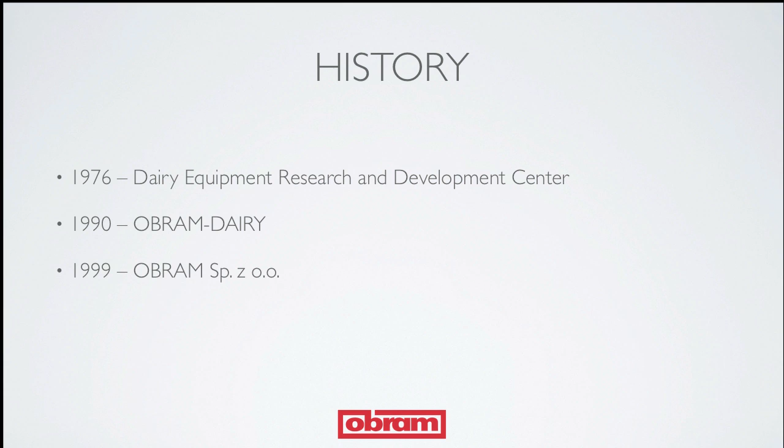The company specialises in producing equipment for the dairy industry, as well as the distillery, brewing, chemical and pharmaceutical industries. OBRAM employs over 250 people, including more than 100 engineers, specialists in the following branches: food technology, designers of technological processes; construction and design, designers of machines and equipment; industrial automation, designers of computer systems for production control, together with a system for control of critical points in manufacturing processes, the registration of parameters and visualization; manufacturing technology, preparation and supervision of the equipment production service.

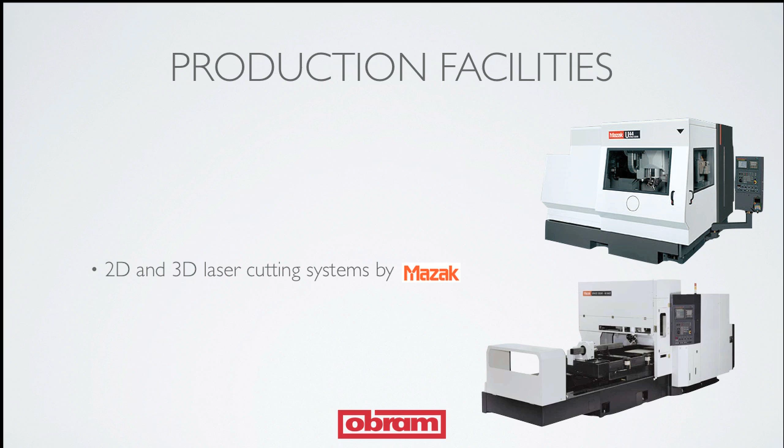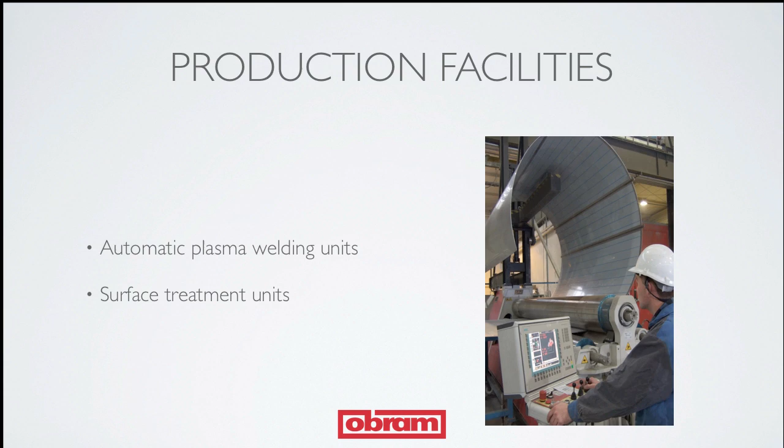Production facilities are localized in two factories in Olsztyn and in Ostrów Mazowieckie, which occupies 6,000 square meters in total. The company is equipped in modern machinery necessary for manufacturing cutting-edge equipment. This includes laser cutting systems, CNC centers, automatic plasma welding units, and surface treatment units, and so forth. Experienced and skilled employees guarantees the manufacturing of equipment with the utmost care, which also ensures an internal quality control system. OBRAM solutions use components only from reputable companies worldwide.

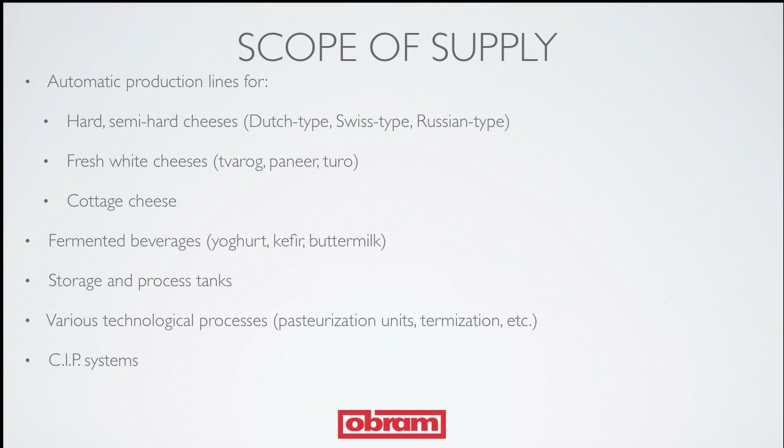The flagship OBRAM products are automatic production lines for different types of cheeses: hard, semi-hard, fresh, cottage cheese, as well as complete solutions for the production of fermented beverages. The company also manufactures all necessary equipment like storage and process tanks, pasteurizers, CIP systems, membrane filtration systems, and so forth.

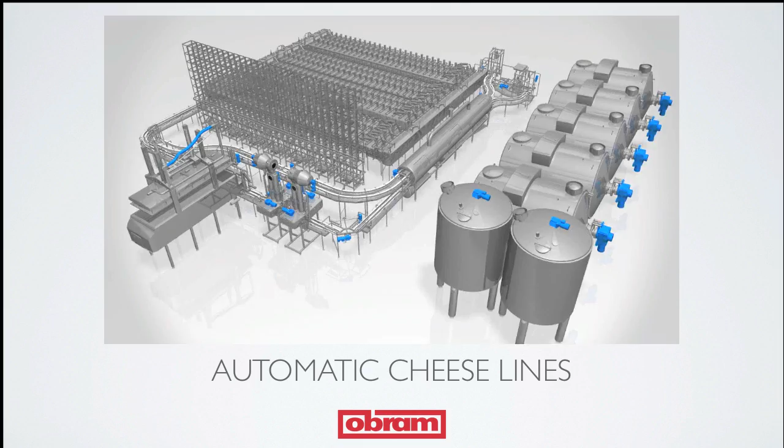Automatic cheese lines manufactured by OBRAM are designed for production of various types and kinds of ripening cheeses: hard, like Gruyere and Emmentaler; semi-hard, like Dutch, Swiss and Tilsit, and also semi-soft. The line size and composition may vary and depend on the market demand, ranging from several thousand to 1 million litres of milk processed per day. Cheese lines use closed transportation system ideology, involving individual pressing of each cheese. To operate such a line, only 2 people are needed.

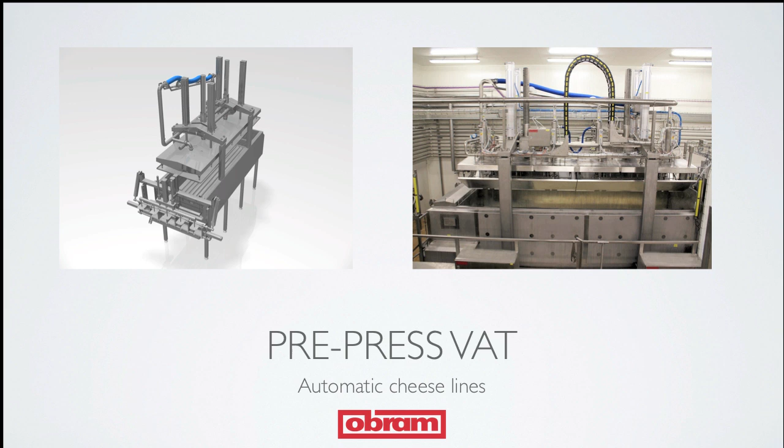A pre-press vat receives curd, drained off whey, pre-presses protein mass, and cuts cheese into portions. The pressure on the mass block is adjustable. All the vat functions, including cheese portioning and loading into molds, are carried out automatically and controlled by PLC.

The device consists of a vertical column in which curd moves. The system of valves gradually drains off the whey, maintaining the whey level above the cheese mass block. This condition is necessary in the production of cheese, with eyes typical for Dutch-type cheeses. The bottom part of the column is equipped with a system for cutting off the shaped cheese blocks, which are then put into the waiting molds.

Unlike the moulding columns for Dutch-type cheeses, the construction of these columns ensures the whey draining in the first stage of the process in order to provide good contact with air. The whey draining off rate depends on the type of cheese being produced. Moulding columns also work together with a conveyor for feeding empty moulds and collecting ones with cheese.

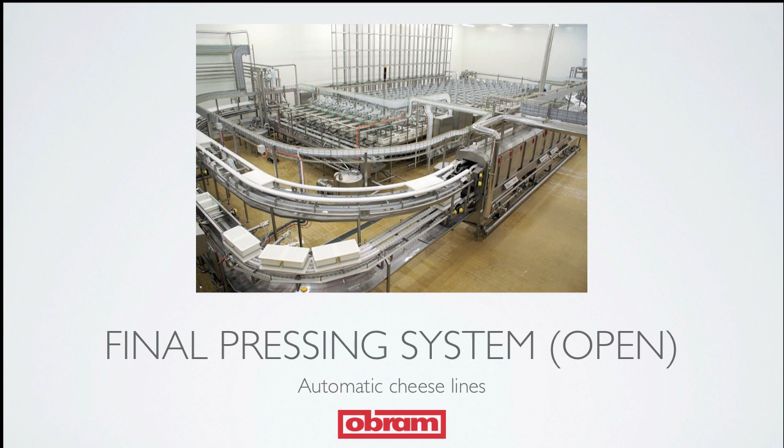The process of final cheese pressing is carried out in tunnel-shaped presses, whose structure is adapted to the mould size and the configuration of the cheese-making line. Presses may be single or multi-level, open or closed type, using forced pressing or cheese self-pressing. This force and duration in various phases of the process are adjustable.

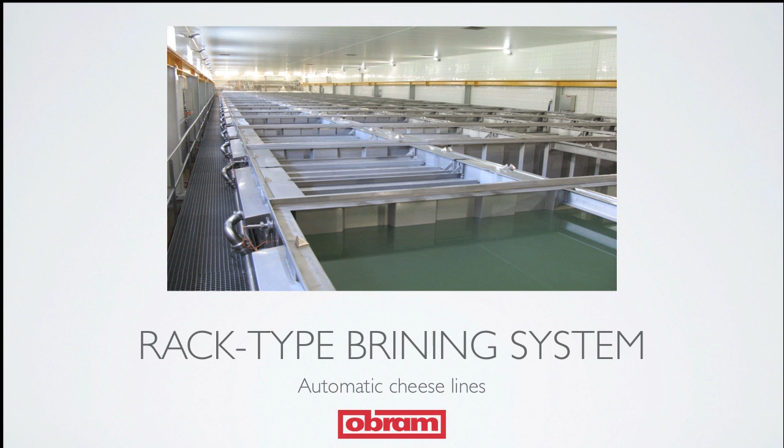Cheese brining may be done in various manners, in a rack type, in a river type, or in a mixed system. Each of these systems consists of similar elements. The difference is just the way the technological functions are performed. Microfiltration unit improves the microbiological quality of brine. It decontaminates and restores the brine's original form.

OBRAM also provides systems for cheese ripening. Another flagship product is automatic line for fresh cheese production. Equipment might be used for several types of cheese production: Tvarog, popular in Eastern Europe, Indian paneer, Kashkaval, or mozzarella.

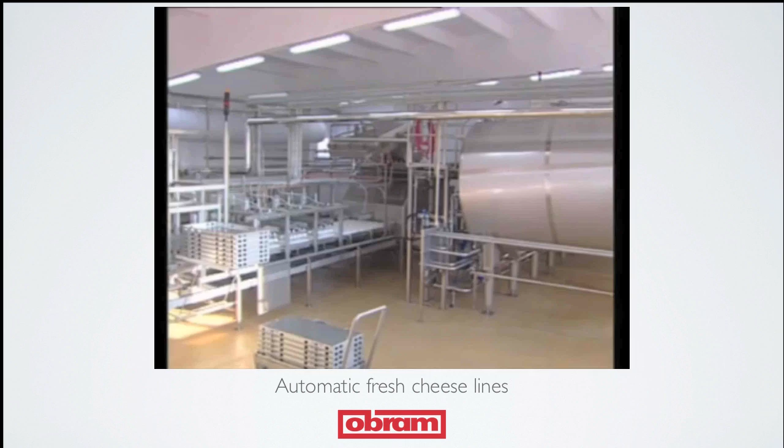Following thermal treatment, normalized milk is pumped to coagulation vats at the temperature of inoculation. Addition of the starter initiates the process of fermentation in the coagulation vat. The resulting curd undergoes thermal treatment and is evenly and gently stirred. Subsequently, part of the whey is separated and the curd thus produced is transported to the moulding and pressing device, where it is moulded to achieve the shape and the size requested by the customer.

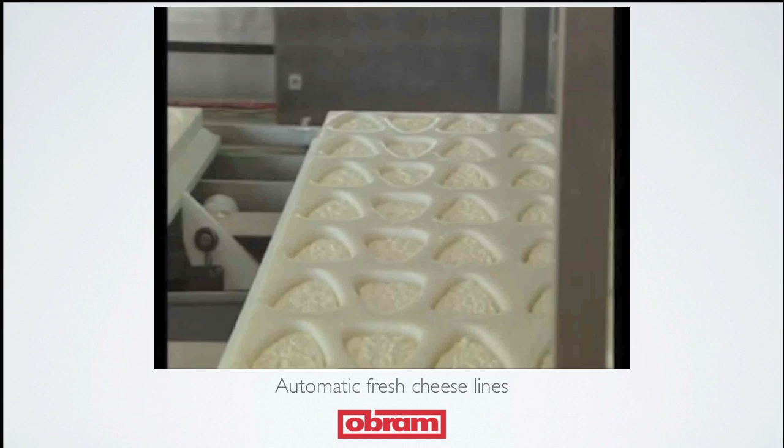Portions of fresh white cheese are put into moulds and finally pressed. Following the pressing phase, multi-moulds are emptied and transported to the cleaning station, while the cheese is packed and cooled down in a flow-through or transported to the cooling chamber.

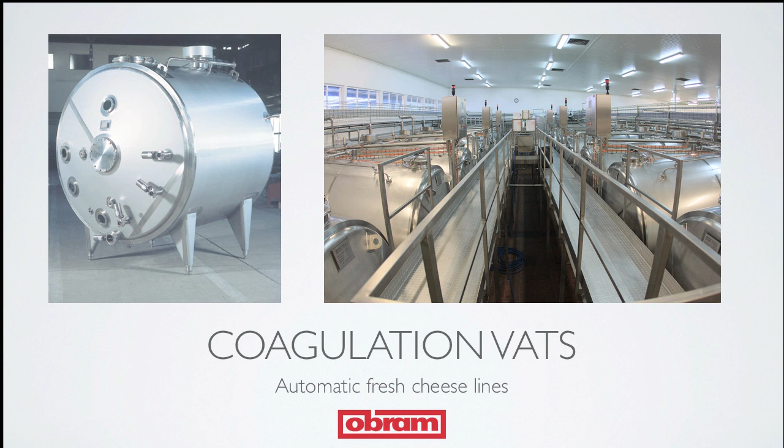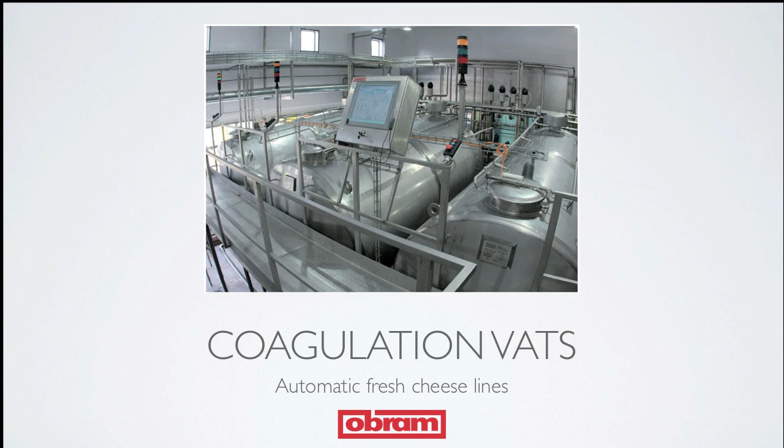Depending on the customer's needs, OBRAM offers coagulation vats with two working volumes, 6,000 and 10,000 litres. Owing to the process automation and the vat's horizontal shape, it is possible to achieve high-quality curd mass with minimal protein loss. An integral part of the system is a belt whey separator, which separates whey from curd mass.

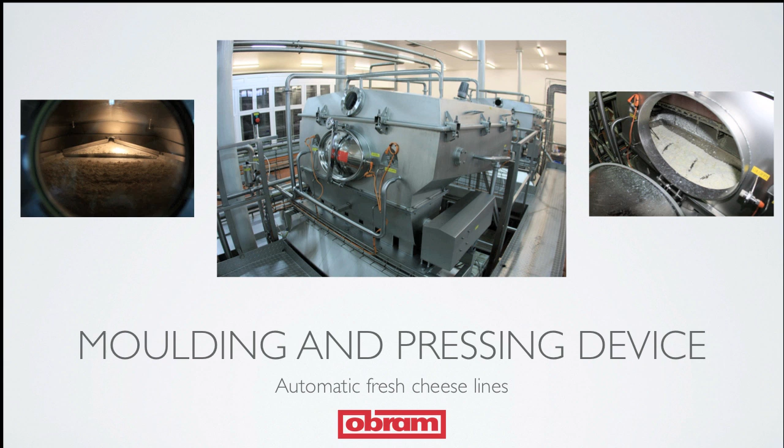OBRAM has designed original multi-moulds with a monolithic plastic structure, and depending on the cheese shape, 20 to 40 cheese portions can be pressed into them, with a total weight of about 10 kilograms. The shape of cheese portions depends largely on the customer's needs.

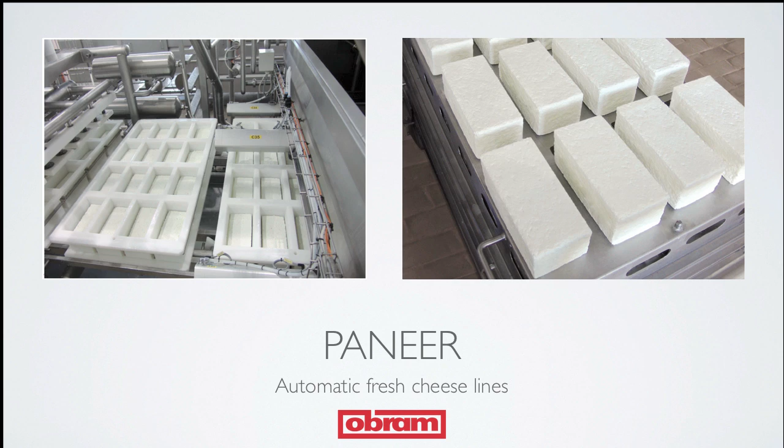The advantages of OBRAM's automatic fresh cheese production line are: the fresh cheese production process, from milk preparation to cooling down, is all automatic, with no human contact. Each stage of the technological process is supervised and archived by the central automatic control system.

It is possible to produce fresh cheese in any shape. It is possible to produce fresh cheese with equalized mass. There is also the possibility to adjust fresh white cheese unit mass, and a CIP system for device cleaning.

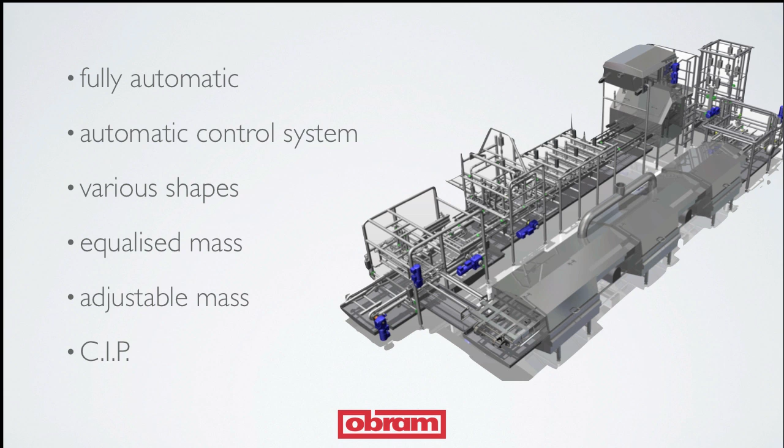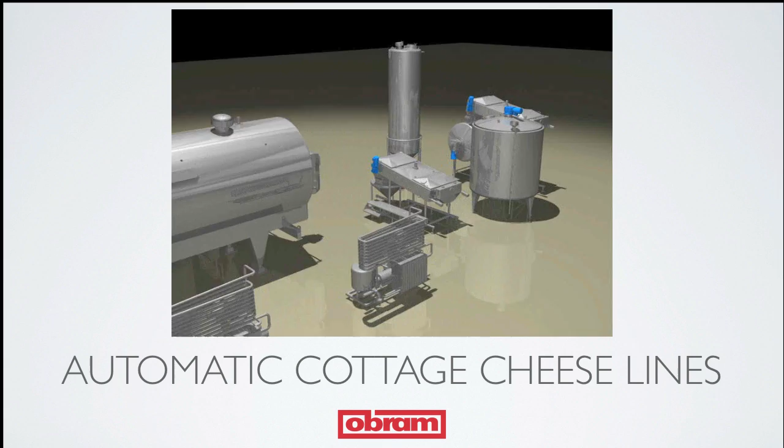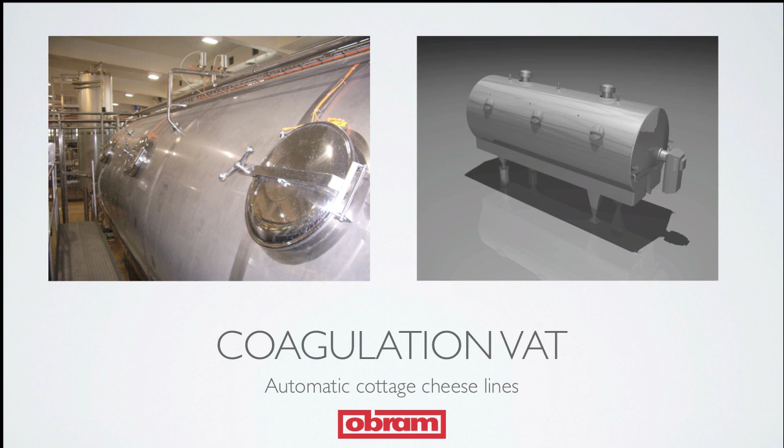Another predominant OBRAM product is the automatic cottage cheese production line. This consists of the following equipment: pasteurizing systems, coagulation vat, whey draining belt, rinsing cooling tower, water drainer, and creamer. The coagulation vat is a horizontal closed processing tank used in the production of cottage cheese grains.

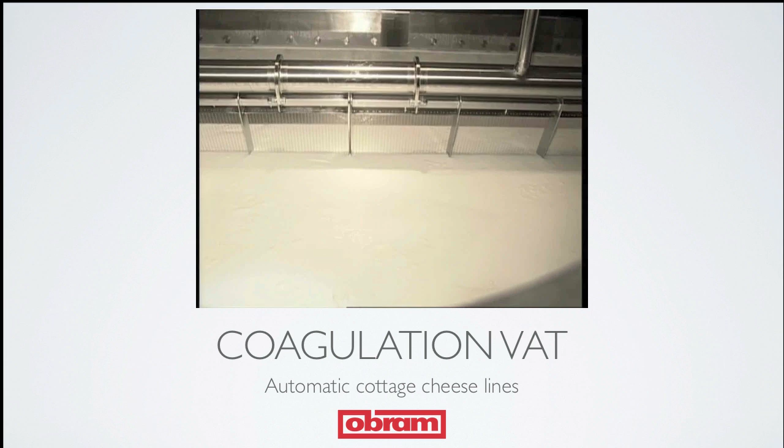It offers a pneumatic lifting system with which the vat can be easily emptied. Inside the vat there are mixers and harps for mixing and cutting the curd. The vat is also equipped with a whey draining system.

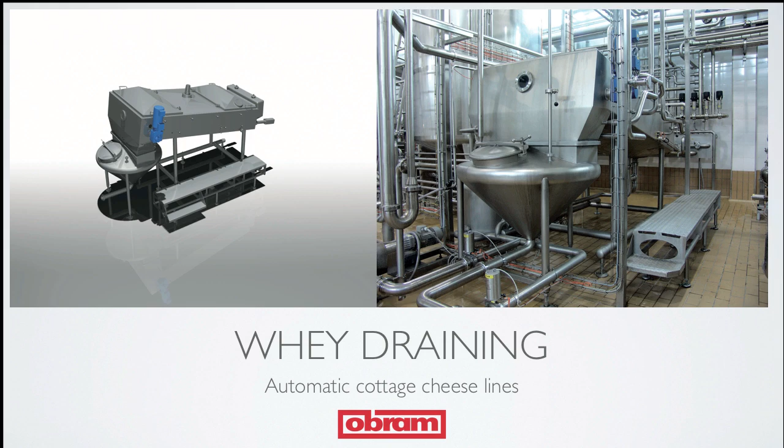The whey draining belt consists of a drip chamber, a draining belt system with a drive, a belt positioning system, and a buffer tank for the separated curd. The buffer tank is equipped with nozzles to enable the addition of process water to the curd, which is to be pumped to the rinsing tower.

Inside the rinsing cooling tower, small amounts of whey are hydrodynamically separated from the curd with technological water, and the curd is cooled down before its final creaming.

The creamer is a process tank used for mixing the curd with cream. The construction and fittings of the creamer permit the following technological operations: mixing the curd with cream using specialised mixers, curd storage, measuring the weight of curd and cream, and curd cooling.

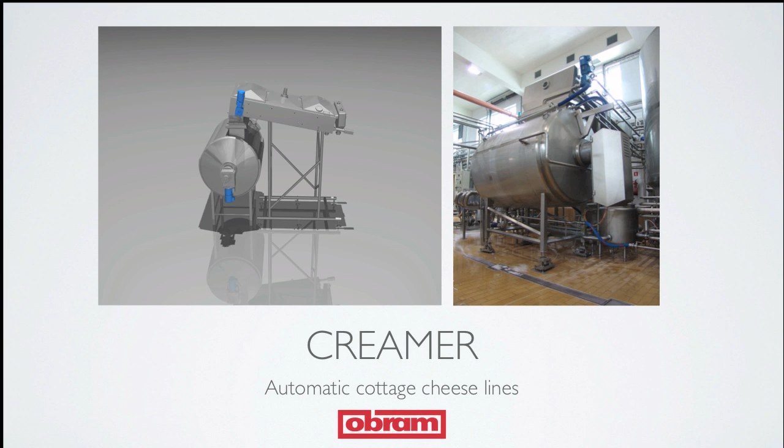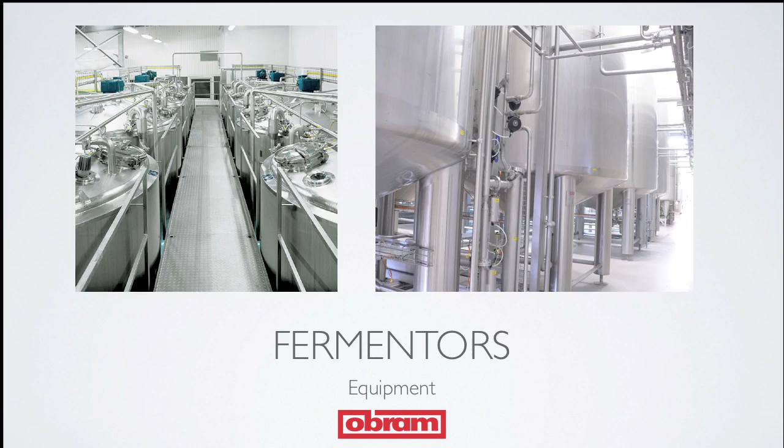OBRAM also manufactures all other equipment necessary for dairy plants like storage tanks, fermenters, pasteurizers, CIP systems, and more.

A very important department within OBRAM is automation, which is responsible for process automation as well as automatic control systems. The automatic control system is based on PLC controllers integrated with computer software. OBRAM uses PLC controls from various companies like Siemens, Allen Bradley, Schneider Electric, and Moeller.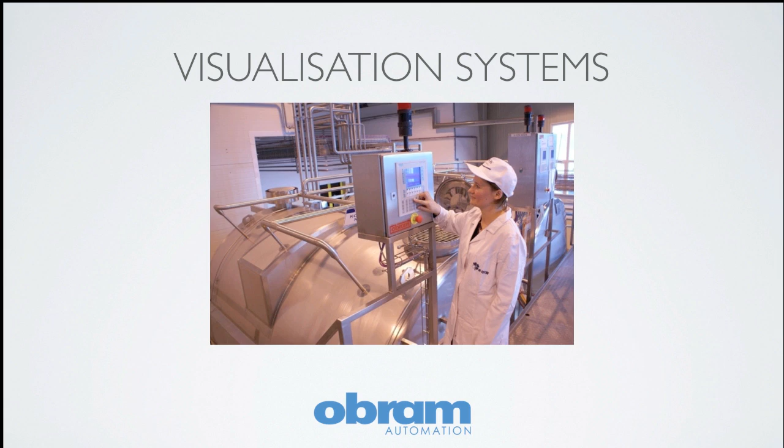With the panels, the operator can observe the process at each stage, follow the important technological parameters, modify recipes, and handle emergency situations.

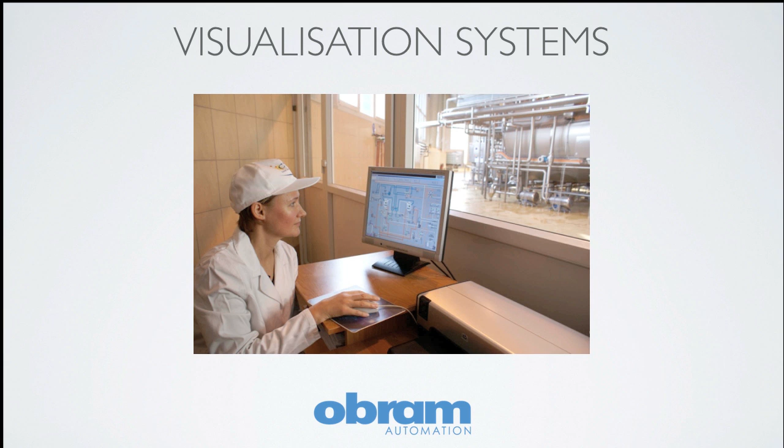A very important role in the production supervision is played by the central system of data visualization and archiving. Particular stages of the technological process are presented on a screen as separate synoptic screens.

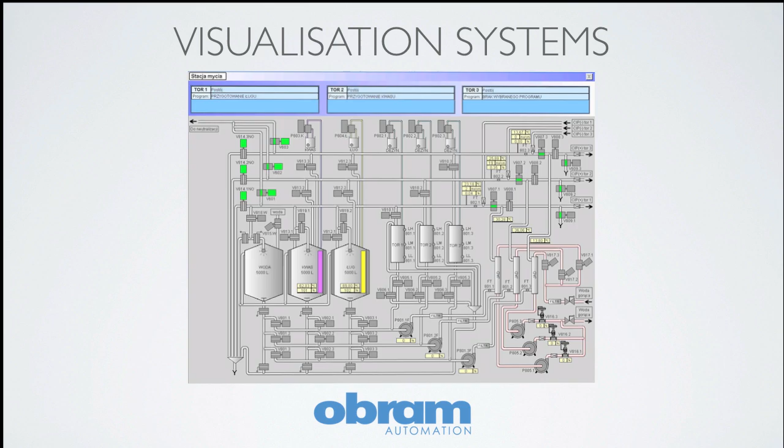The visualization system is also equipped with an advanced reporting system. Clear tables present production data, cleaning processes, and so on. The reporting system is a valuable source of information necessary to optimize the production process.

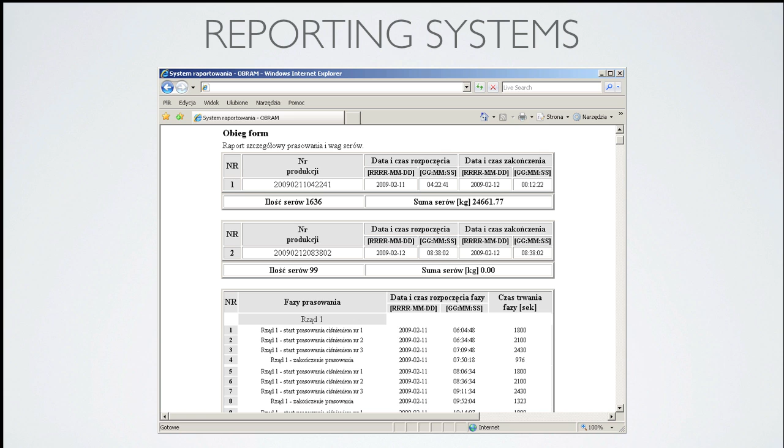The control system may be equipped with a remote servicing system, which enables immediate service assistance provided over the internet. The possibility of making data available to other information systems enables integration, for example, with the production management systems or the quality management systems.

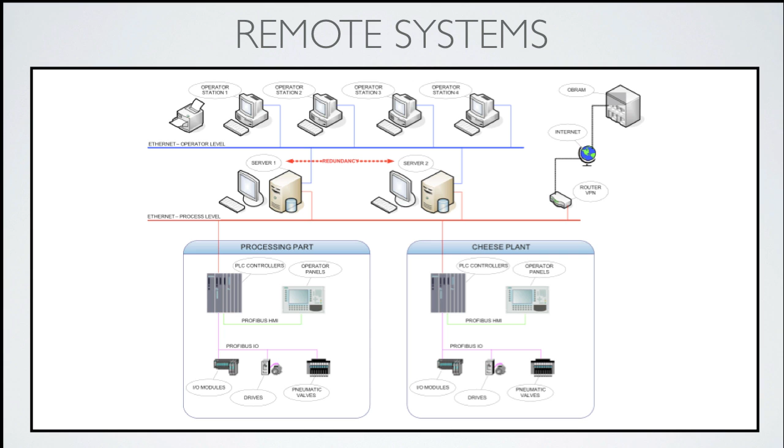OBRAM creates turnkey projects taking full responsibility for delivery, installation, integration, startup, and service of all equipment.